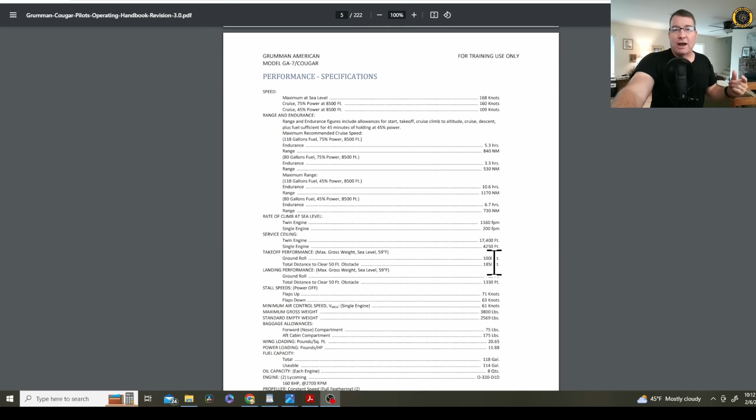For example, where I live at 3,000 feet, this aircraft would be virtually useless to me as a twin engine aircraft. I could only operate it as a single engine aircraft, because quite frequently the density altitude here at 3,000 feet is well above 4,000 feet density altitude. So if I had an engine failure on takeoff, my only choice would be to close the throttle on the good engine, treat it like a single engine aircraft, and crash straight ahead.

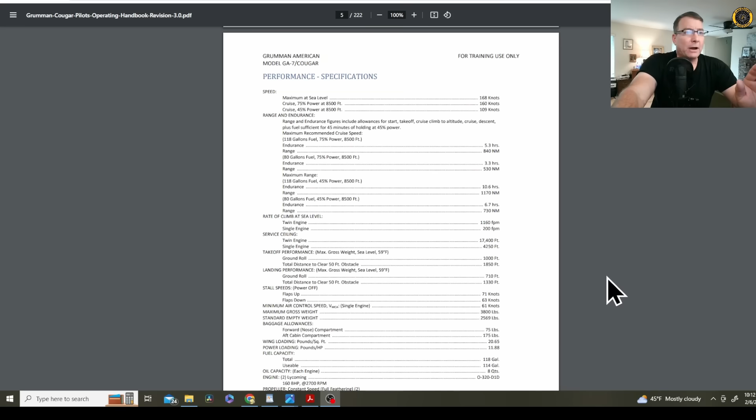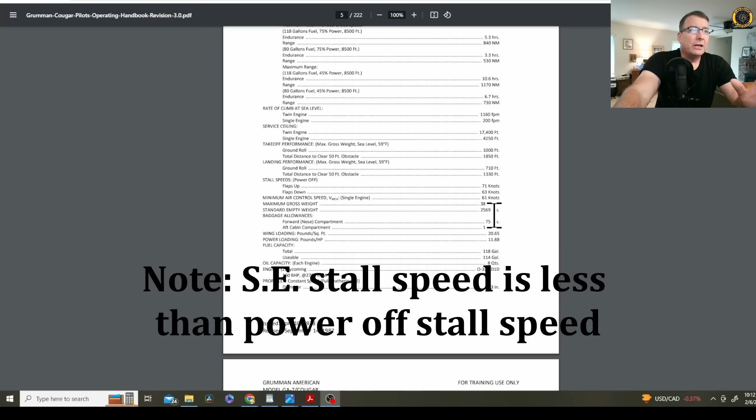Another issue with this choice of engines is the stall speed versus VMCA. The stall speed on this aircraft books out at 71 knots, flaps up. The VMCA, or minimum control speed in the air in a specific configuration, is 61 knots. So VMCA is well below stall speed.

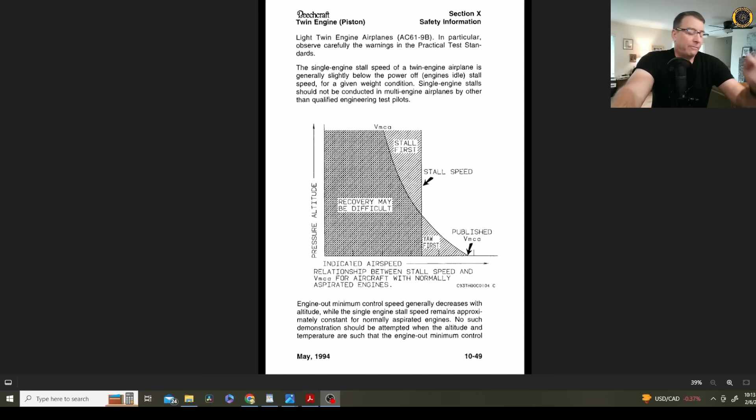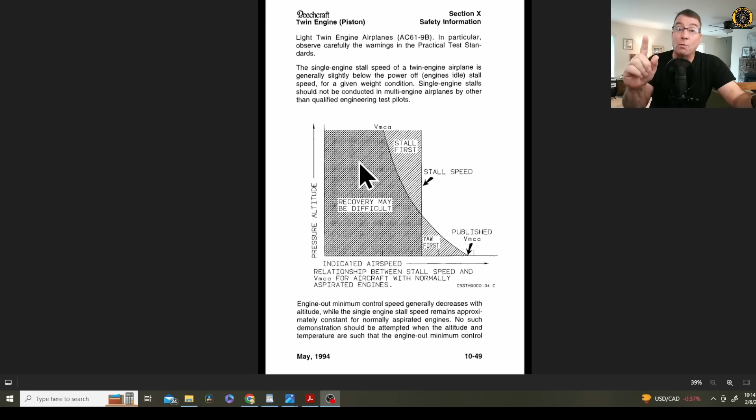I'm going to keep beating this dead horse because people are not getting the message. What is the problem if your stall speed is greater than VMCA? This is the region in the Beechcraft Pilot Operating Handbook where you are not to be operating for VMCA demonstrations. What are the ingredients of a spin? Stall and yaw. What's a stall? Exceeding the critical angle of attack. So if you exceed the critical angle of attack on one engine in this aircraft, what are the two ingredients to that spin? Stall and yaw. So if you slow this Grumman Cougar down to its stall speed on one engine, you will spin the aircraft.

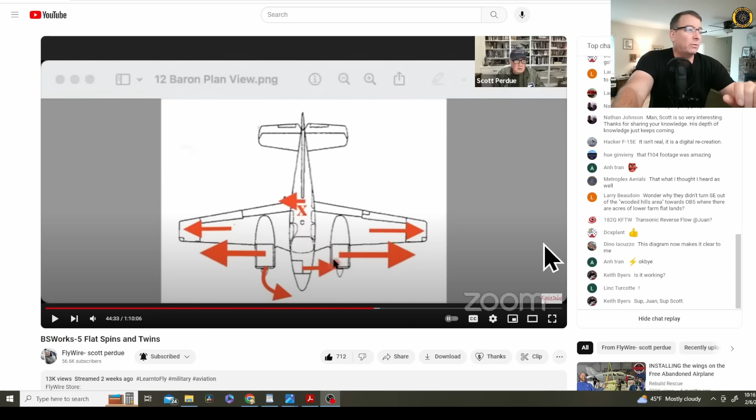What's the problem with spinning a twin? First, it's a prohibited maneuver—you are never supposed to spin a twin on purpose. And if you ever get into a spin, your chances of recovering are very slim. Why? Because of the angular momentum from having all that mass outside the center of rotation—two engines plus fuel tanks—means you won't have enough rudder authority to recover from a spin in a light twin, as we discussed with Scott Perdue on his BS Works video about flat spins in twins.

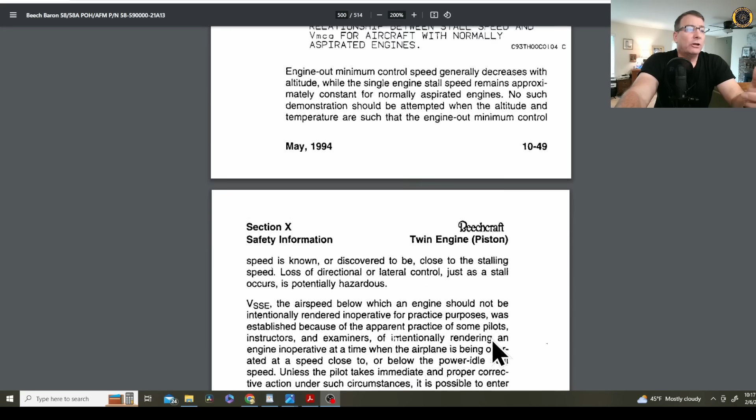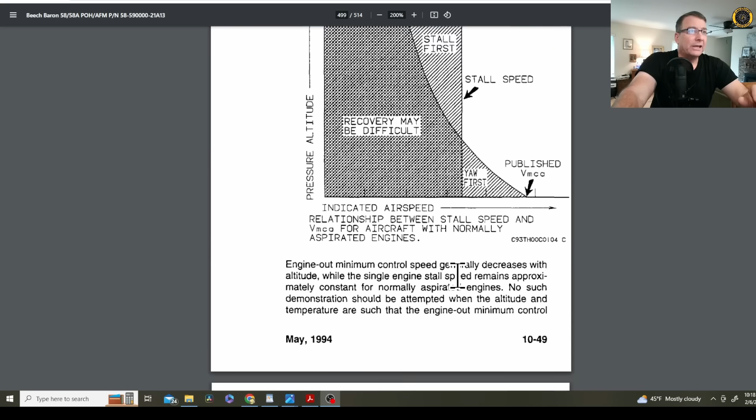Just as the book says in the Baron manual, if you're in a condition where you're going to reach stall speed before you reach VMCA, no such VMCA demo should be attempted when altitude and temperature are such that engine-out min control speed is known or discovered to be close to stalling speed. Loss of directional or lateral control just as the stall occurs is potentially hazardous. Another point brought out by an old-time multi-engine instructor: the wild card is the students in these VMCA demos.

We'll get to the engine failure on takeoff in a moment. But on VMCA demos, once the demo is concluded, the student needs to carefully get the aircraft back into flying condition by reducing power on the good engine, lowering the nose, and then easing the rudder out.

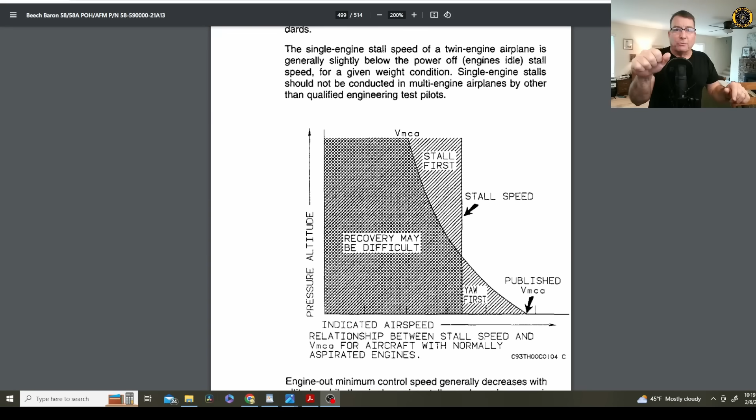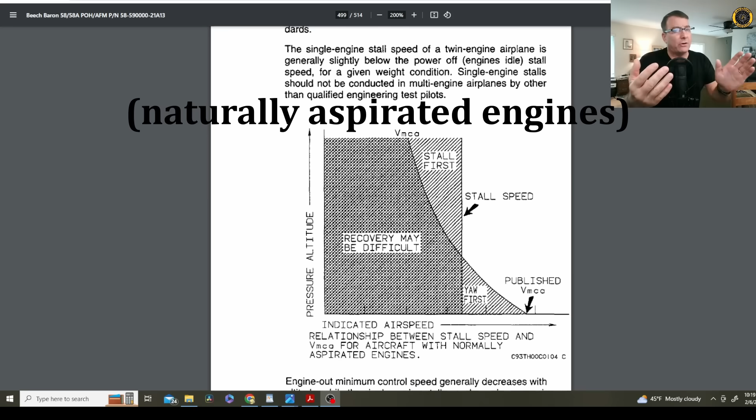What we think may be happening in a lot of these VMCA demo crashes, which is not the case in this particular accident, is the student pulls back on the throttle a little bit—but up at altitude you hardly reduce manifold pressure at all if you just pull the throttle back a little—and then lets off the rudder too soon. Wham, off to the rodeo you go. You've got to come off that rudder easy and gently get the airspeed back up.

Now back to the crash at hand. The most important number for Sam, as soon as he started having engine troubles, is the blue radial, 85 knots, the best rate of climb speed on one engine. Any indicated airspeed less than 85 knots, the aircraft is going to descend. Any airspeed more than 85 knots, the aircraft is not going to climb.

Why? Because anything less than 85 knots creates too much induced drag on the aircraft, and you're going to continue to lose energy. Why will it not climb above 85 knots? Because you simply don't have enough power on the anemic 160 horsepower Lycoming engine to climb out on one engine at speeds greater than 85 knots.

Again, your best rate of climb might be 200 feet per minute, which it looks like he was obtaining, and that's probably because the other engine was making partial power, one of the most dangerous situations you can be in.

So look at the engine failure after takeoff: 75 knots indicated airspeed or above. If you're less than 75 knots, you're better off just closing the throttle and landing on whatever is ahead of you. After 75 knots, depending on so many variables—just like the same variables of everybody trying to do the impossible turn back to the runway—that decision's got to be based on your loading, your density altitude, and your competence.

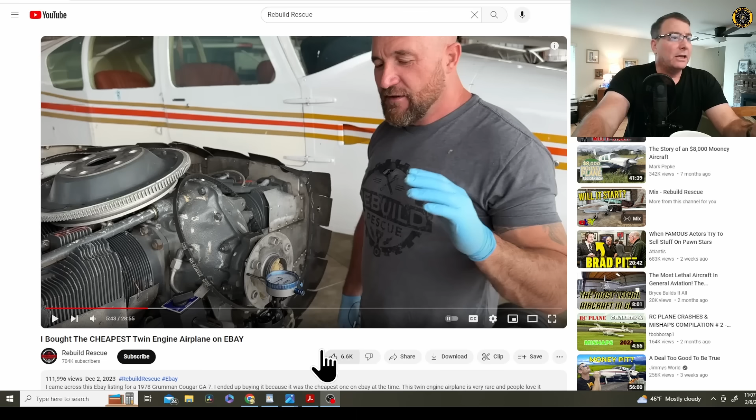The reason this aircraft never sold is most people would realize that really the best thing to do is to completely overhaul the two engines, split the case, magnaflux and inspect everything. But Jason does the minimum required by the FAA on these certified aircraft, that if they suffer a propeller strike, you do a run-out of the crankshaft, as he's demonstrating here, and replace the accessory drive gear on the back of the engine.

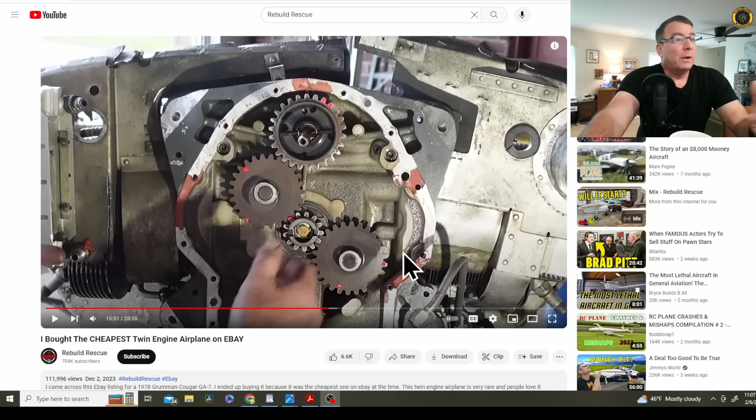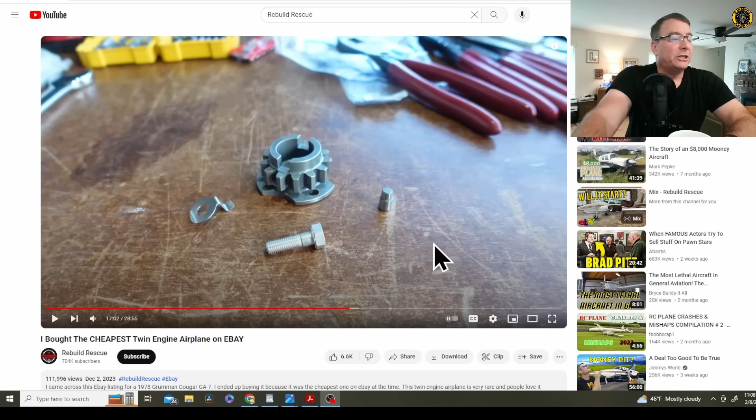Here's that accessory drive gear that's required to be replaced. To get to that on this particular airplane you have to pull the whole engine off, take the accessory case off, and replace this drive gear. Remember, Jason is not yet an A&P mechanic, though I assume he's working under the auspices of one. Actually, the absolute minimum required by the FAA is to inspect this dowel pin, but Jason does the right thing and replaces the entire gear.

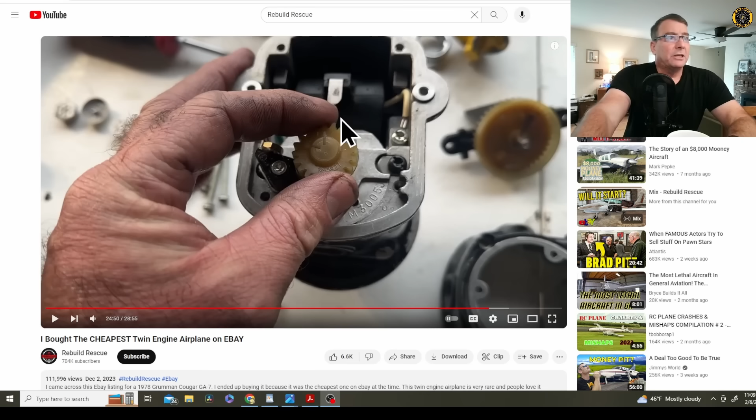But that leaves in question the magnetos themselves. The magnetos have plastic drive gears inside, and it's unclear from this video series - that's the problem investigators will have, since videos like this are edited, so you don't know exactly what work was done. In the end, did they replace all these magnetos, or just run with the existing ones? Investigators looking at the crashed airplane will examine the condition of these magnetos, take them off, bench run them, and see if they operate correctly. These plastic gears can be broken quite easily in the event of a prop strike.

Another accessory investigators will be looking at closely is the carburetors. In one of the videos he mentions the left carburetor leaking and that they were going to replace it, but in the end did they replace both carburetors?

One thing I couldn't find throughout all these videos - and again it may have been edited out, we don't know - is what did they do to go through the entire fuel system on this aircraft? Did they really clean those fuel tanks and double, triple check the purging to make sure there was no sediment? That may have been the cause of the entire accident. It may very well have had nothing to do with the work they did on the aircraft - what if he received a load of water in his last fuel load before he took off on his last flight? Proper pre-flight procedure is that you need to sump those tanks and make sure there's no water in them before you take off.

There's a lot here investigators are going to be combing through, a lot of work Jason did on this aircraft in a short amount of time just to get it annualed. This aircraft wasn't rebuilt, it wasn't restored, it was annualed - given an extensive annual inspection, 2 rebuilt propellers, and a lot of work done on the engines.

They swung the landing gear. I didn't see where they checked the rigging on the landing gear - something that on the 310 takes nearly 2 days worth of work to check, and you have to do that every year. But investigators will be looking through all these videos closely to see if there's anything that corroborates what they find on the engines of the crashed aircraft.